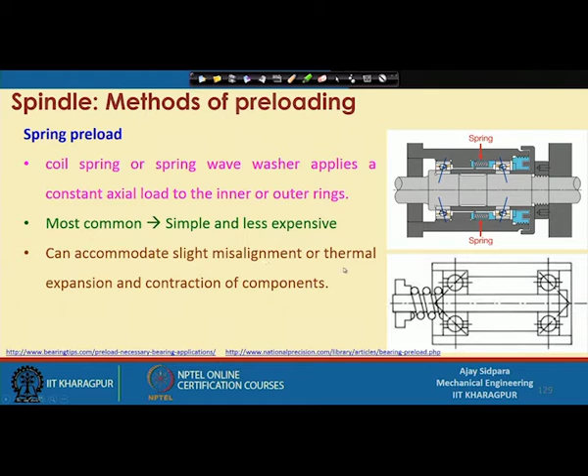So we have seen in the last class that one of the methods is called spring preload, by which you apply a preload by means of a spring. We have also seen that it will accommodate slight misalignment because of the thermal growth of the component, mostly the shaft. So in this particular case, moving here and there will not make much difference within a certain part.

And then let us discuss the second method, which is the solid preload. Now what is the solid preload? Instead of a spring, what we are using here is one type of nut. This particular nut will actually fix the inner race or outer race depending on our application, so that you can actually get the angle or the contact angle between the races and the ball.

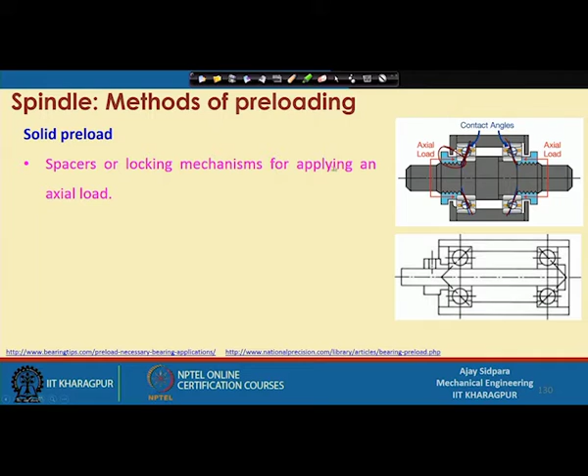So what is that? You can actually give motion by means of a spacer or the locking mechanism for applying an axial load. This is called the spacer or locking mechanism, because it is a thread. So you actually rotate it and it will push the inner race or outer race in different directions.

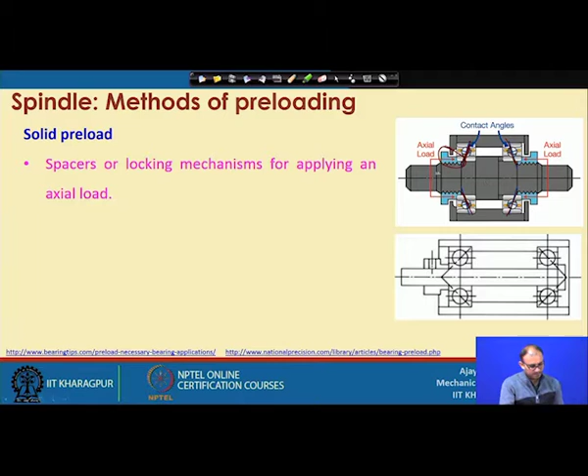Why is it good? Because it has high stiffness and the design is straightforward. When you are adding a spring, at that time you have to preload the spring a little bit too, otherwise by changing the stiffness of the spring you may get a different type of preloading at a later stage.

But here it is a solid thing, so it is very good in terms of stiffness, because now it will not allow even a slight movement here and there. That was possible depending on the stiffness of the spring, but that is not happening here in this case. And the design is straightforward.

You have to create one thread on the shaft only, that is enough to get this done. But if you want to do the same thing for spring loading, at that time you have to create a cavity also, then you have to take the dimensions of those parts, because everything is an internal part, and here that is not the case.

So that is the advantage of this particular part, but the problem is that whatever was the advantage of the spring loaded design becomes the problem here, because there is a change in preloading due to expansion and contraction with thermal variation and wear. Now what is happening here, if there is thermal growth of the components, in the spring case the spring will take care of those things, but here nothing is there which is flexible like a spring.

So in that case it will not be able to compensate for minor changes in dimension, and your system will create a problem, because if there is expansion or contraction with thermal effects and wear, your system will be in a tighter situation. That means either the preload will increase or the preload will decrease. So that is the situation with this part.

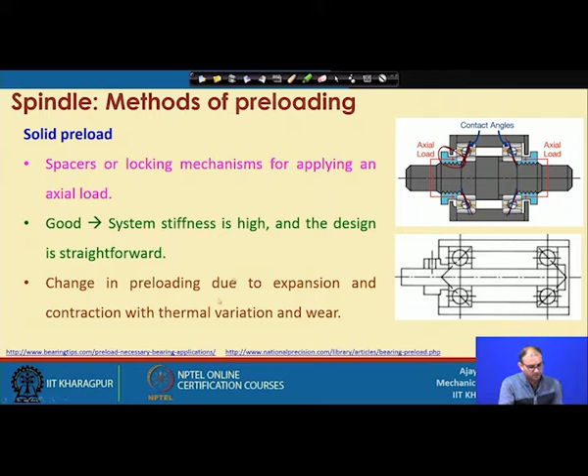So what is the magnitude of preload is important here. The angular contact bearing must be preloaded in order to provide the axial and radial capability that we have seen. Now there are three ways: light preload, medium preload, and heavy preload. We have seen that light preload means you are not giving much preloading, and heavy preload is excessive preloading.

So if you are talking about light preload, it allows maximal speed and less stiffness, because now you are not pushing the ball too much into the races. At that time you have less contact there. With less contact you can go with high speed, because there is no contact, meaning less heat generation and less friction, right.

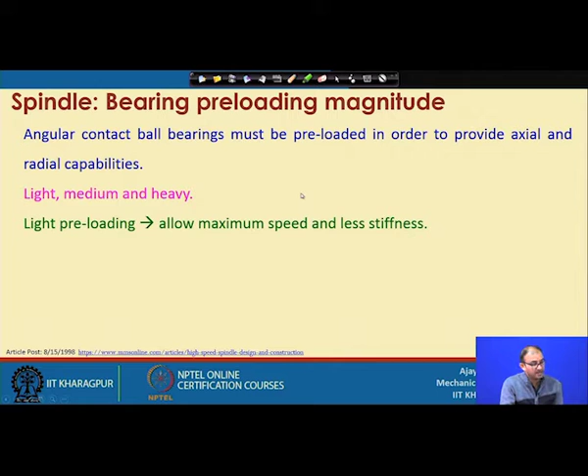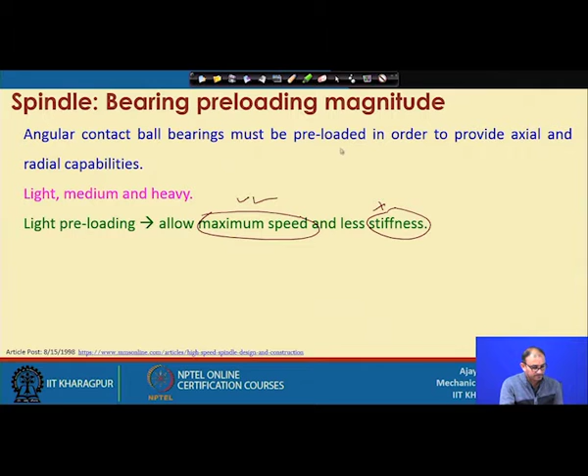But stiffness is less, because now it is not firmly gripped with the inner race and outer race. So you have to compromise with the stiffness. That is not a good thing, but here you can go with the high speed. So that is the advantage. Light preloaded bearings are often used in very high speed applications where cutting loads are also very light and top RPM is needed.

Now, when you are talking about the machining of plastic or some type of polymer material, we know that we are not actually going to get a very high amount of forces. That means your stiffness is not an issue. There is less stiffness, but that does not mean there is no stiffness. There is a stiffness, but it is not enough to sustain the forces of metal cutting.

But if your application is something like microfluidics, where polymers are being machined by a micro machining center, our objective is that the cutting forces are very light because we are cutting a polymer material or something similar to plastic, and the RPM is very high because we have to maintain productivity also. If you go with high RPM you can go with a high feed rate, and with a high feed rate, within a short time you can cut a very long cut in the machining part. So that is the advantage of light preloading.

When you are talking about heavy preloading, it allows less speed, because now your ball is firmly gripped between the inner race and outer race. If you go with high RPM in this case, we know there is high heat generation, friction and wear, which creates a problem at a later stage, but you will get high stiffness. So now you have to sacrifice the speed to a certain limit - you cannot rotate more than 30,000 or 40,000 RPM - but you can get the stiffness.

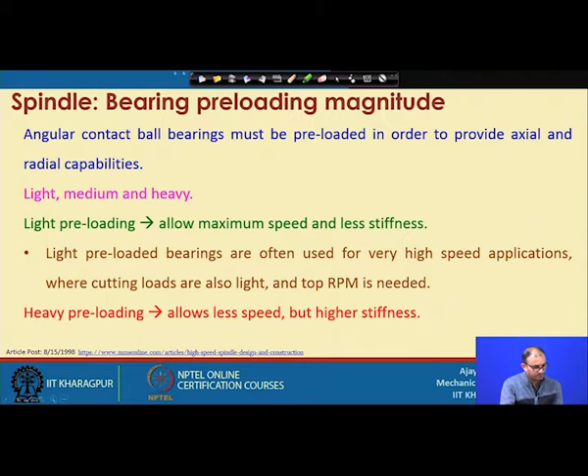So now, what is the duplex bearing? We know that a machine tool must be capable of resisting deflection from multiple directions while maintaining both rotational and positional accuracy. So we are talking about both axial loading and radial loading in both cases. So what is going to happen here?

Consider that we have a shaft here, and this is one bearing located at the rear side, and this is at the front side, and our cutting tool is located at this location. Now you are doing machining with this part. You have one set of bearing at the front and another set of bearing at the rear. When you do cutting with this part, you are going down into the material, and then you are cutting by this - doing some slot cutting or slot machining.

At that time, when you have only two bearings, the maximum load you will get at this location, because the front loaded bearing is mostly more loaded due to its location near this part, but you will get loading here also. All the load, whether axial load or radial load, will be shared by the two bearings only.

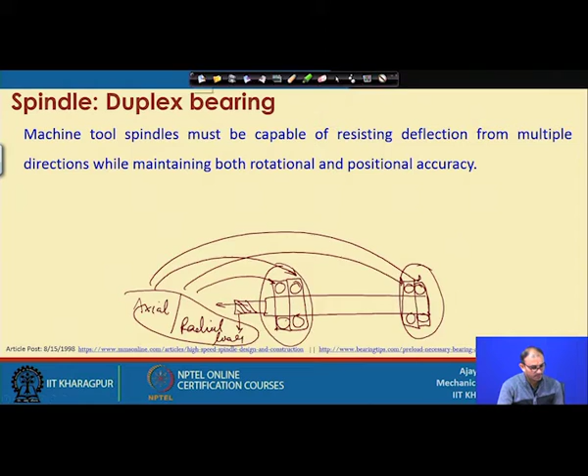So what is the duplex bearing? It mounts several angular contact bearings to provide the required load carrying capacity. It provides load sharing and high stiffness, because now our shaft is connecting at two different locations.

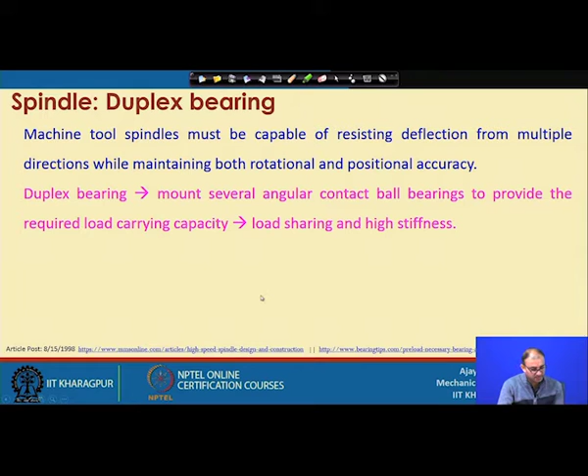So this is the one thing, this is the second thing. Now, high stiffness is important, because if it is fixed at two locations only, then stiffness is less, but if you add one more here, then it is gripped at two locations. So your shaft is firmly gripped between the two bearings. Now you will get high stiffness, and the load is also shared, because earlier the load was divided by 2 only, now it is divided by 4. So per unit load will be less in this particular case. That is a very good advantage compared to the single row bearing.

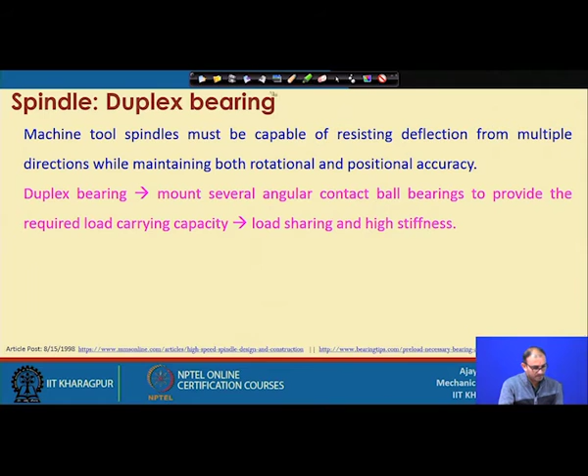So instead of a single bearing, you can use the duplex bearing. Duplex bearing does not mean you are using two separate bearings, but it is a common single unit in such a way that the preloading and everything is designed within the bearing. We will see how those things are there. The duplex bearings have high radial and axial rigidity, which is obvious because we are using two bearings in place of a single bearing.

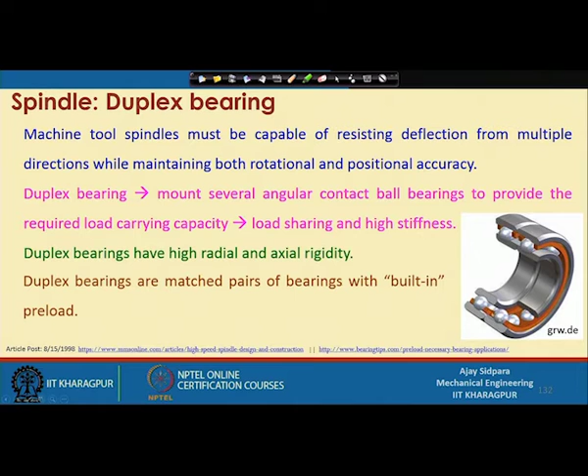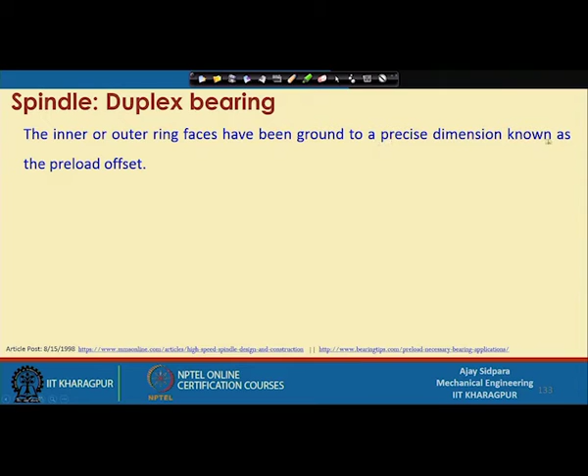Duplex bearings are a matched pair of bearings with an inbuilt preload. So here what we are doing is adding that preload before we put this thing into application, because we know at which location this particular bearing is going to be used. So these are specifically made bearings for specific applications. The inner race or the outer race face have been ground to a precise dimension known as the preload offset. So now this is the duplex bearing.

Now, when you are fabricating or manufacturing this particular bearing, at that time itself you are giving this preload offset. So whatever we are looking at here, our inner race has no clearance in it, no clearance or offset, correct. Now if you see the same thing in the outer race, there is a total preload offset given there. Now we use solid preloading here.

So when you are putting this nut into this particular part, it will push this outer race, and then as you continue, you will not get any type of clearance here. Now clearance is filled, and other than that, if you see this particular part, the contact angle is 0 here, because we know contact angle is the measurement between these two axes. So this is the contact angle alpha, but it is considered mostly as a radial bearing only. So here what is happening is that when you are pushing this thing, you will get a contact between these two parts, because you are pushing from here.

So you will get a contact here, and you will get one line passing through the contact between the inner race, outer race, and the ball. So you will get an angle also. This is the way you can actually get the preload offset, and when you push the inner race or outer race, depending upon where you are putting this preloading, you can get the things done. So this is the duplex bearing.

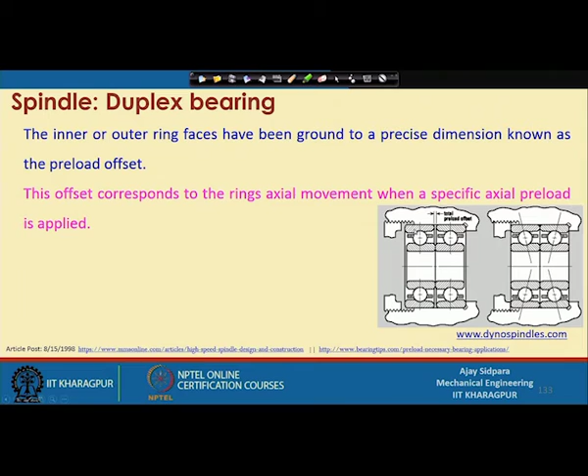This offset corresponds to the ring's axial movement when a specific axial preload is applied. So when you are putting this axial preload, at that time this offset will be matched or completed, and you can get the firm contact between the bearings. So when the bearings are clamped together at assembly, the offset faces close up and establishes a permanent rigid preload in the bearing set. So this is the permanent preload.

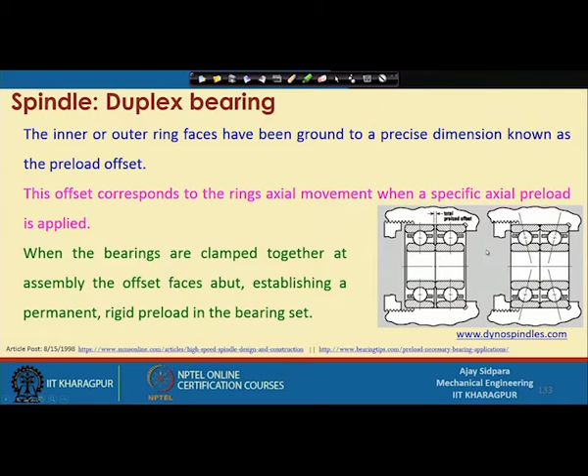Now, when you remove this particular part, at that time it may loosen a little bit here and there, depending on the total stiffness of this particular bearing, and then this particular thing will create a very high permanent preload for a certain application. So now you are not worried about the system where you are getting the radial load or the axial load during the operation.

So, what are the different types of mountings are there? This one is called face to face or X configuration.

Now if you see this particular graph, the same thing is here. When you are pushing your outer race into this direction, see this contact angle, it is 0 and these axes are matching with this vertical line. So when you are moving the outer race in this direction, the contact between the inner race, outer race and ball is following this line.

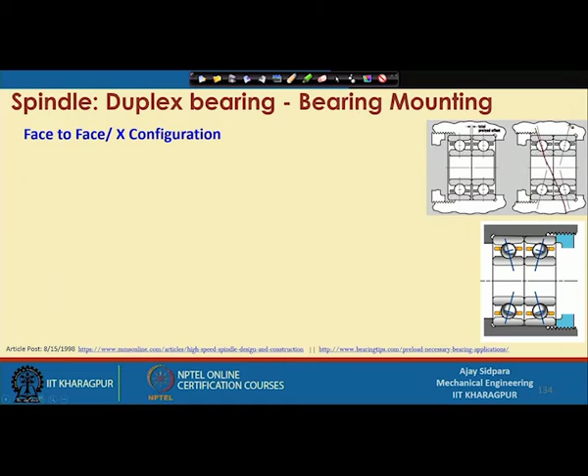So if you follow this, this configuration is called the X. Now if you see, all axes are moving in this part, and that is why it is called the X configuration or face to face configuration.

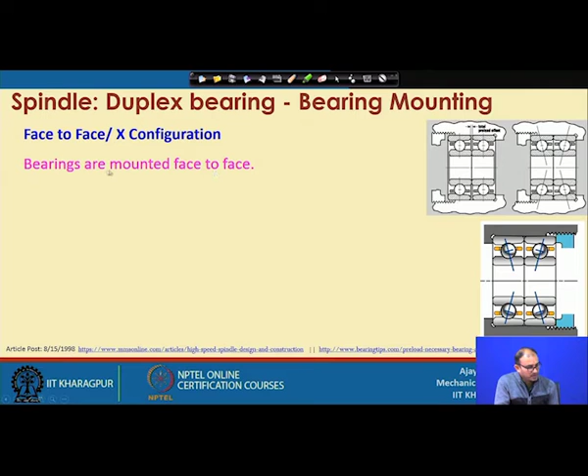So what is this thing? Let us see. Right, so bearings are mounted face to face. This is what we are looking at this time.

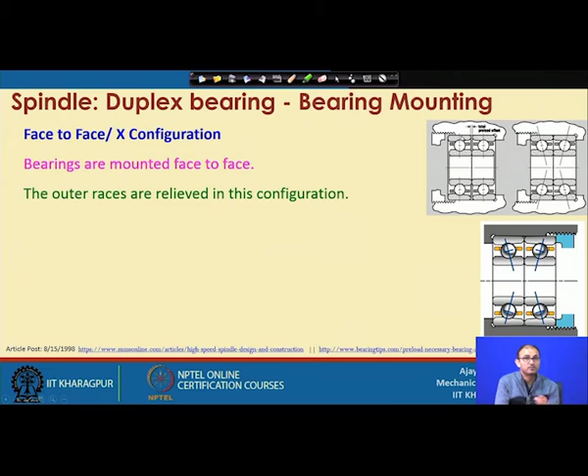The outer races are relieved in this configuration. Relieved means we are working with the outer race only, where we are providing axial loading for the direction in this part. This is again the same direction in the color graph.

When the outer races are clamped together, the relief clearance is eliminated, resulting in the correct preloading.

Right, so here it was not preloaded, you consider there is some radial play available. When you are pushing this part, you get the motion, your contact will occur here, and the ball will move, it will happen here also. So these are the contacts. This is moving in this, so it will move in the opposite direction, and you will get the radial preloading in this particular way.

Right, so the bearing pair is capable of withstanding both axial and radial loading. Now everything depends on this particular angle created here. We know that the higher the angle, mostly we go with axial loading, and the lower the angle, then we are more focused on radial loading, correct.

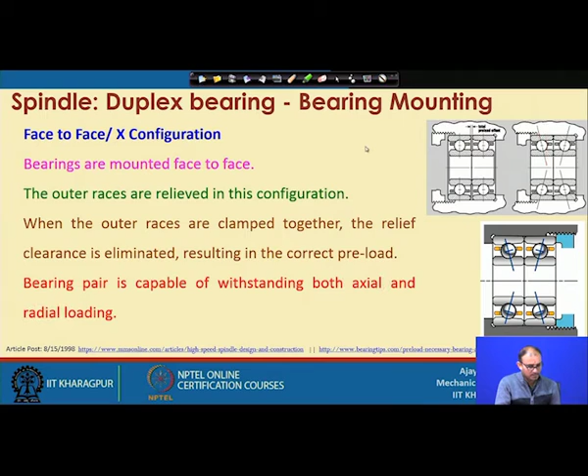Another one is the back to back or O configuration. Now here, instead of pushing the outer race, we are pushing the inner race. So now whatever way we have given the same preloading offset, but now it is on the inner race. This preloading offset is here, but there is no offset here at this location, correct.

So now we are threading the shaft, and this particular thing will push this material. When you push this part in this direction, it will push this shaft, so this inner race will move in this direction. When it is moving, you have support from this also at this location, and at that location it will push this inner race in this direction. So you will get contact at 4 different locations on the 2 bearings.

Right, so when it is pushing here, this is moving in this direction, so it will create a contact here, and this ball will move and create a contact here. So this is for this particular bearing, and we know that this side is completely blocked here.

So when you are pushing here, it will push this inner race in this direction, creating a contact here. Because of this contact, the ball is also moving in this direction, creating contact here. So in that way you will get double contact.

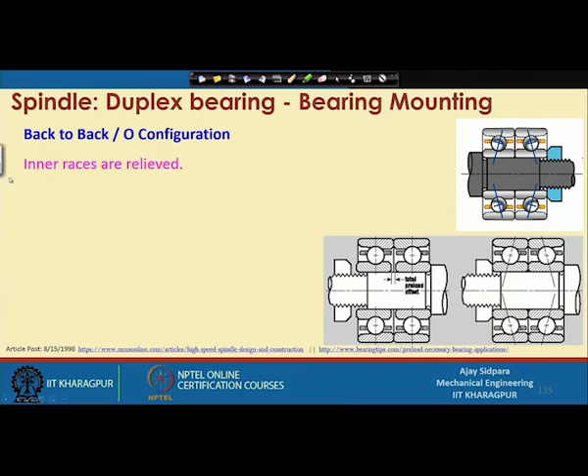So what is the difference - in the earlier case we were relieving the outer race, but here we are relieving the inner race. This is suitable for most applications and provides good accuracy and rigidity. So that is the advantage of using this particular back-to-back or O configuration.

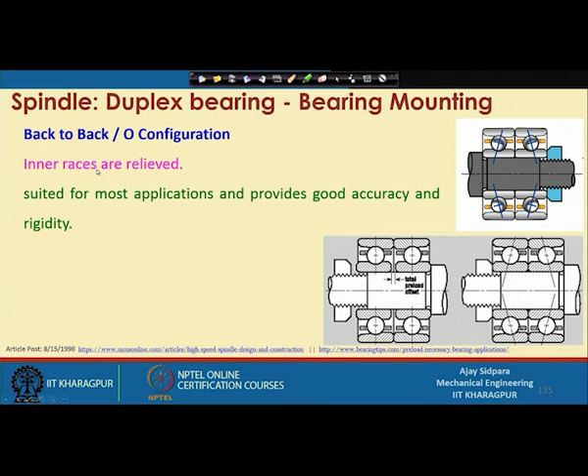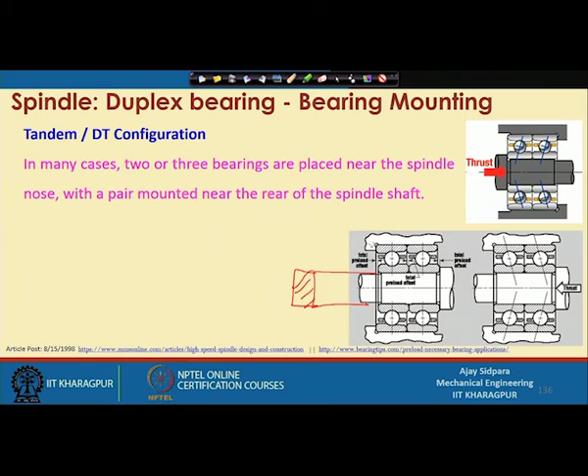In many cases 2 or 3 bearings are placed near the spindle nose, that is on the front side of the spindle. Consider this is the spindle location, so you put 2 or more bearings as a pair mounted near the spindle. Consider this is the cutting tool - this particular thing is called the spindle nose. Now extend this shaft and you reach this location - this is called the rear spindle shaft, at the other end. Because we have to provide the set of bearings on both sides, front side as well as the rear side.

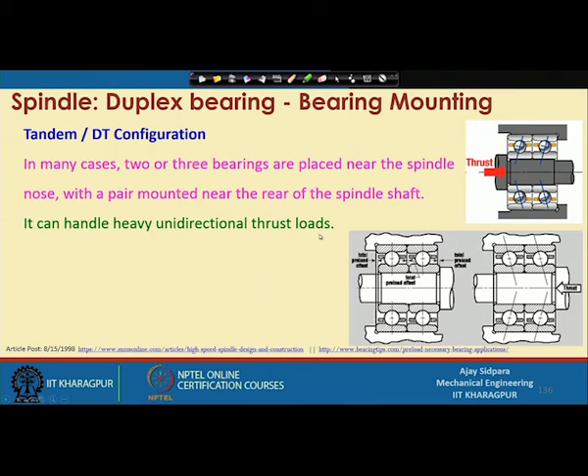It can handle heavy unidirectional thrust loads. This is one of the problems of this particular loading - let us complete this. It does not allow forces in both directions unless another pair of bearings are used on the spindle shaft facing the opposite direction. Now what does this mean? Consider we are providing thrust force from here to fill up this particular gap, so the thrust force is continuously from this direction only. Now consider this is called the unidirectional thrust load.

Why is it unidirectional thrust load? Consider your spindle is mounted here and now it is a drilling operation, so you create a force in this direction. If the force is in this direction, what happens? You again get the problem here. That means whatever preload force you are getting, the thrust load here - if your machining force is more than this thrust load, you are again going to come into this location. That means whatever preloading is there will be sacrificed because of this excess loading in the opposite direction.

So whatever you want to do, you have to provide full loading from this direction only - that is the thrust load. But if you want forces from both directions, you have to get this done in the other way - the other facing bearing should have the opposite direction. So this is one head bearing, and suppose this is one side, then the other side bearing should have this configuration from the other side.

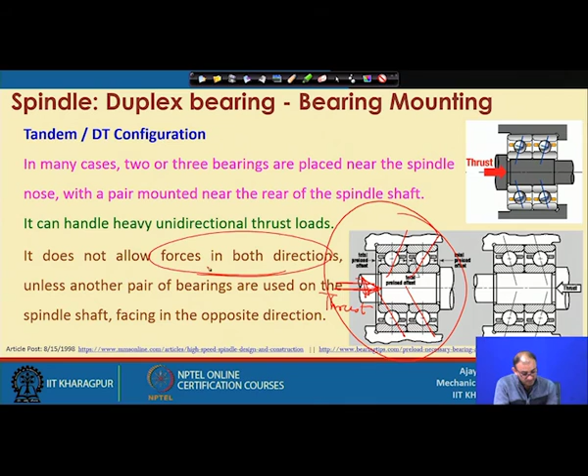So now consider, to get this particular part, you apply force from this direction - that is the thrust force. This is one set of bearings on one side because of the thrust force in this direction. But if you are getting forces from both directions, then whatever the rear side or first side other bearing is, it should have thrust force from this direction. So whatever tandem arrangement there is, this should be opposite to each other.

If this angle is in this direction, then the other angle should be in the opposite direction, that is on face-to-face side, or on the opposite side. Then it will take care of both sides of loading without any problem.

So if you are loading from one direction only, it is better to go with a unidirectional thrust load. That is mostly what we talk about in drilling operation, because once drilling is completed and you are removing the drill bit from the machine surface, it will not encounter more forces since the material is already removed. But when doing milling or cutting of other types of material, you may get radial forces also, and radial force will create a problem for the later operation.

So that is what we have to consider when you want to use the tandem design for a bearing application.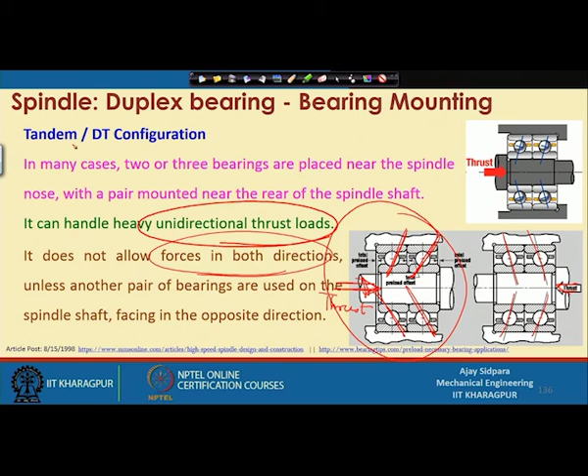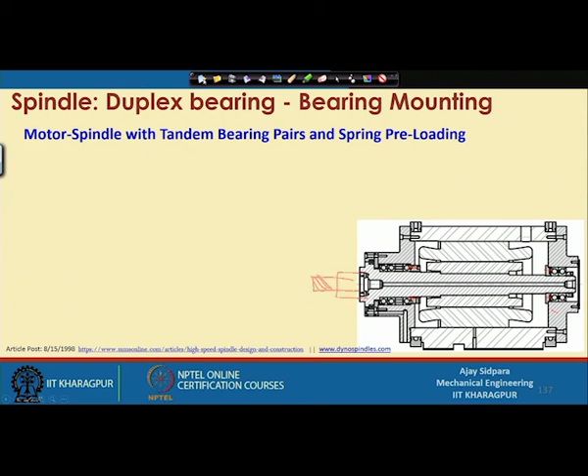So what is happening here is that when the motor spindle experiences temperature rise due to bearing heat or motor losses, there is a thermal growth of the spindle shaft, because this is rotating at extremely high RPM, and when there is heating and motor losses, there is thermal growth of the shaft.

Because of that, the inner race is forced into the bearing. Whenever there is thermal growth, the inner race will try to force into the bearing part. So these inner races will try to move into the bearing side, and this will actually increase the preload, because the contact will be further increased or more aggressive, leading to rapid failure of the bearing.

So what is happening in this particular case is that once this part is done, you have to create one type of floating housing. Mount the rear spindle bearing in a floating housing with springs.

Now, how does this help in our case? When there is thermal growth of the shaft, consider that this shaft is fixed from both sides, and now you heat the shaft. After heating, it will expand. Since both ends are fixed, that means it will bend something like this, or it will bend in this way, correct.

So bending will happen, and once bending happens, your system will completely fail, because it is not able to accommodate this additional movement of the shaft.